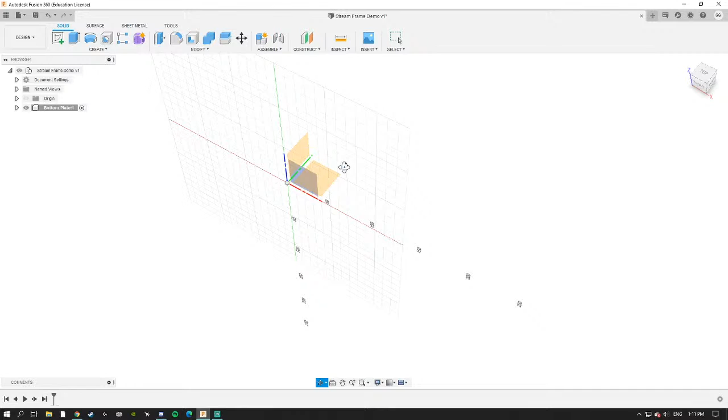And click OK, so now we're ready to start actually designing. Come up to the top, click New Component, and we'll start with the bottom plate. Just name it what you want, press OK. Now you can click L to bring up the little origin, then click the axis you want to start sketching on. I'm going to sketch on the bottom, top-down view.

First things first, we're going to put in our 20x20 screw holes. I like to start with just 2 lines going out left and right. This is good for when you're changing the symmetry of your frame later on. This will be a 3mm screw hole, so I can just type in M3 and we see how we set that parameter earlier on.

If I press OK, what you'll notice is if I finish my sketch, I can come up to parameters, change that M3 value, let's just say to 12, okay? And see how the hole got bigger? Very nice, that's helpful later on.

So I always like to do that when I start designing my frame. Let's put it back to 3mm and keep working. To get back into the sketch, come over to the bottom plate, click on the 2 triangles till you can see the sketch, double click on it, and here we are, back in. Now we want this hole to be 10 millimeters from each of the axes, so when we mirror it around these axes, we get a 20x20 hole pattern.

Am I going to design my own frame for racing? I've been working on a frame for quite some time, almost a year now. Hoping to release it through the Australian frame company Quad Racer / Lethal FPV in the coming months, so look out for that.

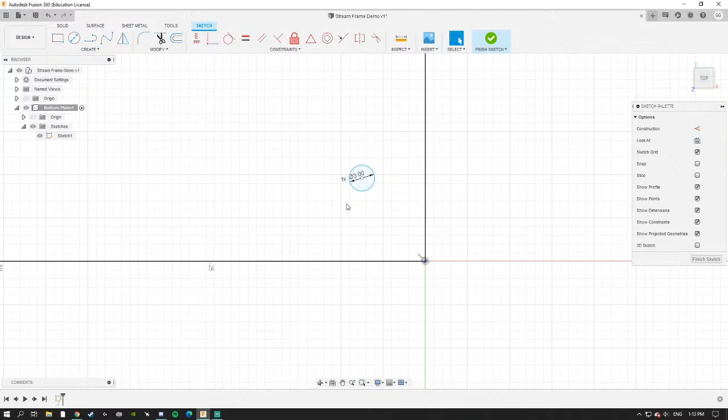Anyway, so to set the distances, we click D. Click on the circle, click on the line we want it to come to, and set that to 10 millimeters. Then click D again, the circle, the line, 10 mil. So now we've got a circle that's an M3 screw hole size that's 10 millimeters from each of these lines.

Okay, then what else would we want? For arm mounting, how about we just do a 30x30 and 20x20 screw hole and leave it simple like that. Come up to circle, make another circle, click dimension, the D key, and set it to M3 once again. Now what we're going to do for this one is set it as a 30x30 screw hole, so that's 15 millimeters from each axis, just like that.

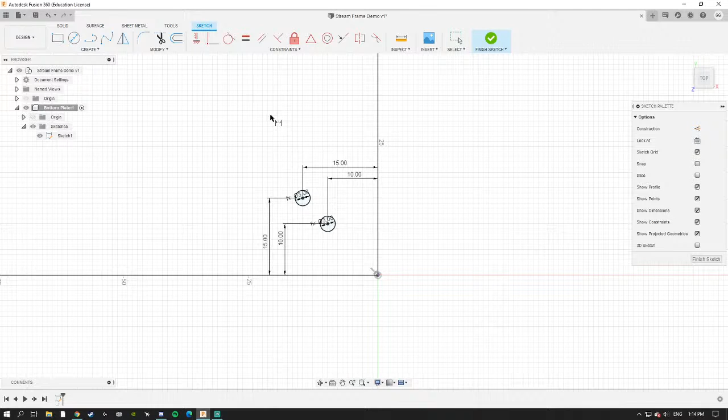So now we've got 2 screw holes for 30x30 and 20x20. You'll see when I mirror it around these 2 axes, it'll become all nice and square. But for now, we'll just work in one quarter. This is good because it saves you doing like a quarter the work essentially versus doing this 4 times, and it's really bad to have to repeat yourself over and over. In the bottom plate, I think these are the only screw holes we're going to need.

So now I'm going to do the outer perimeter of the frame. Because this 30x30 hole will be the outer edge of our bottom plate, I'm going to use this offset tool. Click on the circle, and I'm going to offset it by, let's say, 3 mil. Then I press OK. Now, working off this, I will just get the arc tool.

I'll click once on the circle, once over here, and I'll just place this third point anywhere.

So essentially what I'm going to do is taper in from this perimeter over to this side, and the same over here. Let me quickly do that.

A really handy function we can use here is the tangent tool. If I click tangent, the arc, and then the circle, see how it comes up and stays tangent to the circle wherever we drag it. That's super handy. Another handy feature is that this arc is essentially a section of a circle.

So what we want is for it to contact this line completely perpendicular. Let me try it... no, that won't work. Okay, so another way to do this is to make this line, that point, and this line pretty much touch.

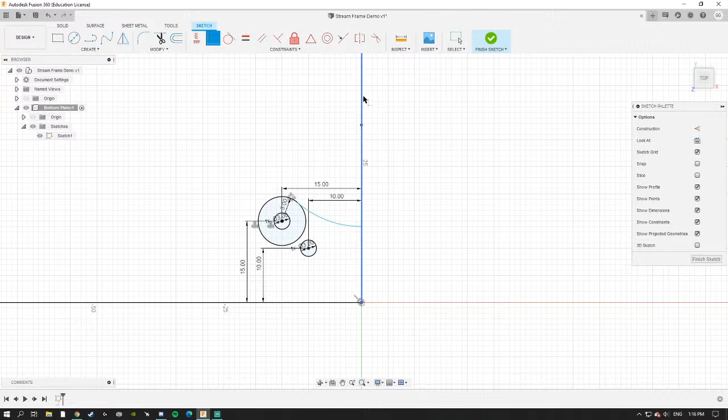So we can use the coincident tool up here. Click on the point, coincident to that line, and it places the center of the circle on this vertical axis, which means this line will contact completely perpendicular, and then it'll be tangent to the circle here.

At this point, it's just personal preference how thin we want to make this, but just for the sake of the video, I'll space it around 15. That should be a good number.

Now what I can do is draw a line from that 30 by 30 hole inwards, and I can actually mirror this line around it.

So I'll do that again. I clicked on the line I want to mirror, create mirror, and then we select the mirror line right here, and see how that just mirrored it nicely.

And then this is where all the magic happens. We select everything, including all these dimensions, but we don't need these lines coming up the top. I don't know why it's still selecting them, so we can just do it manually.

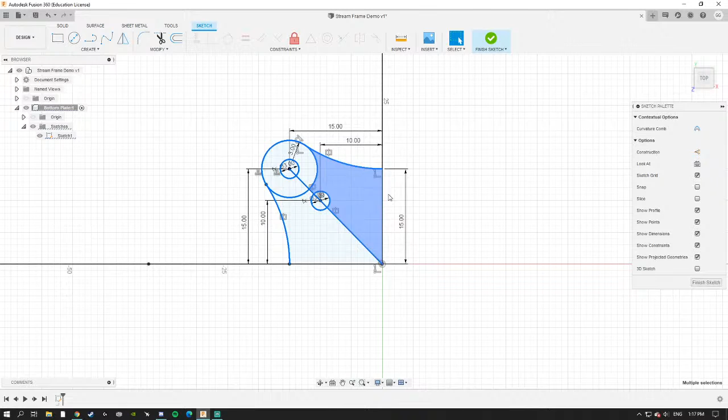Okay, we select everything just like that, and then mirror along this axis. There you go.

And then we select everything one more time, just like that, and then we can go mirror along this axis. And there you go. We've got something that's starting to resemble a bottom plate.

Just for ease of use, lines like these ones here that aren't actually part of the structure, and then these lines that we used for mirroring around, which also aren't part of the structure, what I like to do is highlight them all by shift clicking.

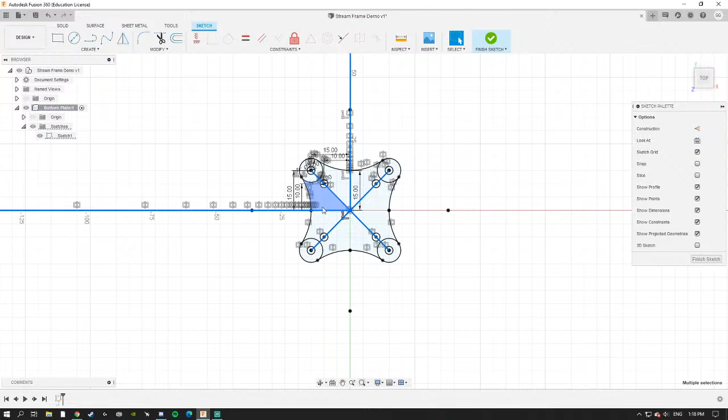Then you can press X. This makes them construction lines, which pretty much means they don't count as a boundary when you're selecting zones to extrude, which is handy. It saves you from accidentally not clicking little portions.

So that's that. Now that this sketch is done, I can click Finish Sketch, and we're going to extrude this to be a 2mm thick bottom plate.

So I'm going to click this middle zone, and then the radiuses around the 30 by 30 mount screws, by once again shift clicking. Come up to my top left and click Extrude, then select 2mm. And there you go, that's a bottom plate.

Okay, now let's start working on the arms. To make a new component for your arms, what I'm going to do is come up to the overall component, select that by ticking this little circle, right click on it, and then click New Component. And I'm going to name it Arms.

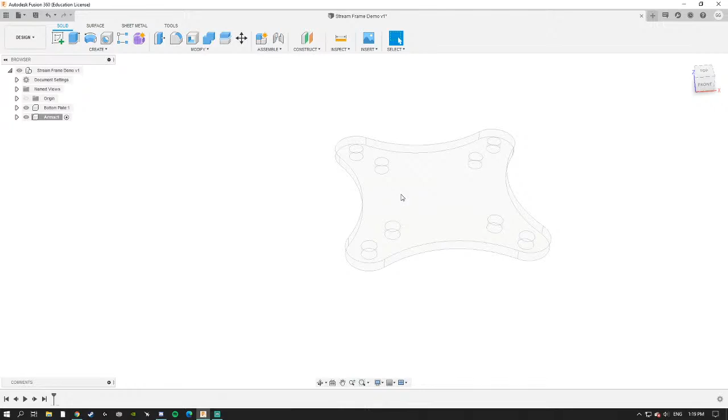I'm going to choose to start my arm sketch at the exact height of this bottom plate. A way I can do this is I can click L, and instead of clicking one of these faces like I did to do the bottom plate, I'm going to click the bottom plate itself.

Okay, now I'm actually sketching, and what you'll notice is I can lock my cursor to all of these screw holes and all of these edges, which makes it a lot easier to build your arm around the bottom plate.

Okay, so where we're going to start is I'm actually going to start by making the tip of the arm and work my way in. So if we want a 200mm motor-to-motor diagonal distance, what we'll do is we'll go a length of 100mm from the center, then click Tab, and set that to 45 degrees. Now we've got 100mm, 45 degrees, and we can click Enter.

So this is essentially going to be the path our arm takes. Because this won't actually be a border of the arm, I'm going to make it a construction line, which is what happens when it goes dotted. And then at the very end of this is essentially the middle of our motor mounting screws. So what you'll notice on most arms is they have that little hole in the center, just in case your motor has a screw at the bottom that hangs a bit low, so it doesn't hit the carbon.

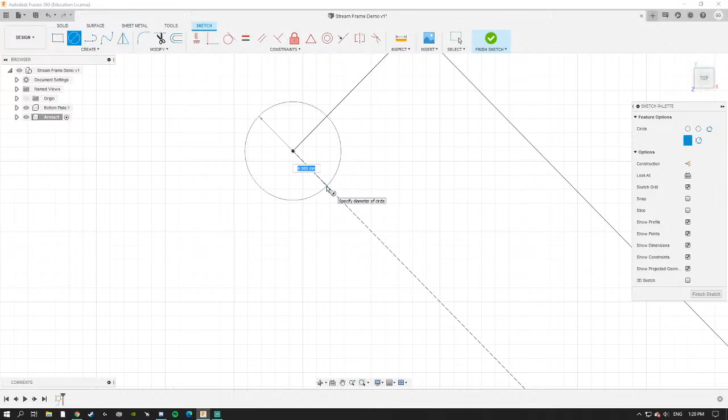So a common size I like to go is about 7.5mm. That seems to work for me. I haven't had any issues with that.

Yes, X is to create the construction line. So if I click on it again, we can make it a solid line. Click on it, X again, construction line. You can also just use the button up here, which does the same thing. So click on the line, construction, not construction, so on and so forth.

Okay, we're just going to go for a typical 16mm mounting pattern. So what we can do here is we can make a circle, click D to set the diameter, and just make that 16. So now all our motor screws are going to lie around this circle.

Now I'm going to make a line going from the center out. What you'll notice is this is because the arms are perfectly 45 degrees, the motor mounting will also be like a perfect cross.

But if your arms aren't perfectly 45 degrees, it's good practice to add this line. Why that's handy is because you add the line, you put the M3 motor screw hole at the end. Luckily for a 45 degree arm, this line ends up being just perfectly horizontal.

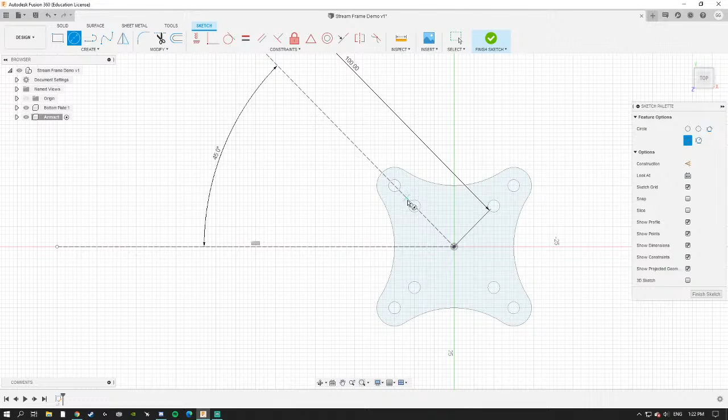But if the arm wasn't 45 degrees, so in something like a Stretch X or Squish frame, or even if your arms don't go through the 30x30 and 20x20 mount holes to end up being perfectly 45 degrees, what you can do is set an angle between the arm and the line going to the motor hole, and set that to 45 degrees. That way you've got your motor holes evenly spaced in relation to the direction that the arm protrudes. That'll make more sense a bit later on.

And then what I can do is... actually, I'm going to try something, this might make my life really easy. So I'm going to highlight the circle and this line, and go circular pattern. I'm going to select this as the center point, and set a quantity to 4. Look at that, how handy is that? So I pretty much saved myself doing that 4 times by just using the circular pattern tool.

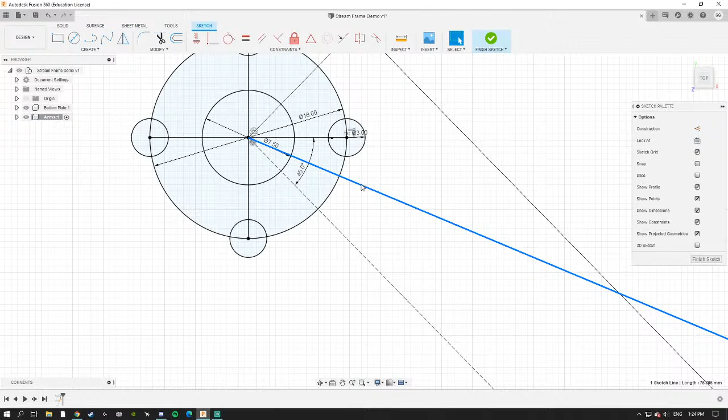Oopsie. I'll show you why setting this angle to 45 degrees is handy. So let's just say your arm came out in this direction. Yeah, I know, mind blown, crazy, eh? Let's say your arm came out in this direction. You'll have this screw hole really close to your arm and this one really far away.

So in this case, what you'd want to do is set the angle from this motor screw line to the center of your arm, set that to 45 degrees. It moved the arm, okay, let's just... where is it? Let's just fix this line in place so we can set this properly. So we set this angle to 45 degrees, and there you go.

Now, in relation to the arm, all the screw holes are evenly spaced. So that's what I was trying to say before with the 45 degree angle arm. Anyway, I can undo that. There we go. So you always keep this angle at 45 degrees, essentially.

Okie dokie, moving on. How did I lock the line?

So if you make any line, and you don't properly define it, you can just move it around, change its length and whatnot. If you don't want to properly define it, but you don't want it to move either, you can right click on it and click fix or unfix, and that essentially makes it green, and now you can no longer move the line around, though you can still change the length. I think length is the only control you have.

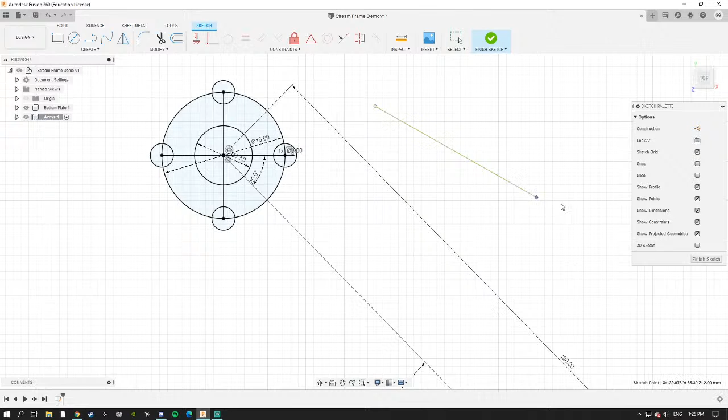Now that this is done, you'll notice there's a lot of lines in here that won't actually correspond to edges of your carbon fiber. Things like these lines going out from the center won't have much effect on the final product, and also this 16mm diameter circle won't have much effect on the final product.

So I'm going to select them all and make them construction lines. Then I'm going to set the distance from the motor hole to the edge of carbon, so I'll just set a circle of any diameter. Then we can use the D function, but instead of just clicking on the outside, we're going to click the outside and then the inside. This allows us to specifically change the distance from the M3 screw hole to the outside edge of carbon.

3mm is usually a safe amount to go, sometimes you can go 2.5. This is more judged by the thickness of your arm and how much strength you want, and how much you want to be breaking your arms at the motor base.

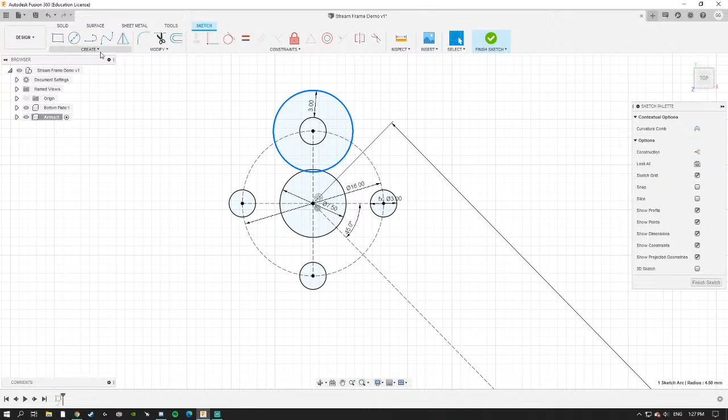From my experience, 3mm usually works pretty well. You'll notice we can also use the circular pattern tool from before. With that circle, set the center point there, and then set 4. Now we've done this 4 times. Let my computer load. Lastly, we want to create a nice rounded edge between each of these circles.

How I like to do that is go to the arc tool, which allows us to select 1 point here, 1 point here, and then get this 3rd point wherever we want. A good place to put it is usually on this 16mm diameter line.

Then I like to use the tangent tool up here. Click on the arc, click on the circle, it becomes tangent. Do the same over this side as well, click on the arc, click on the circle. Look at that, we get a nice smooth transition from the radius around one motor hole to the radius around the other.

Now you just want to do the same for the other sides, so I'll circular pattern that around the center 4 times. Done. You'll notice we don't really need this one because that's where the arm protrudes from, so I'm just going to delete that. But here, if we highlight all this section, this is essentially the end of your arm, all done.

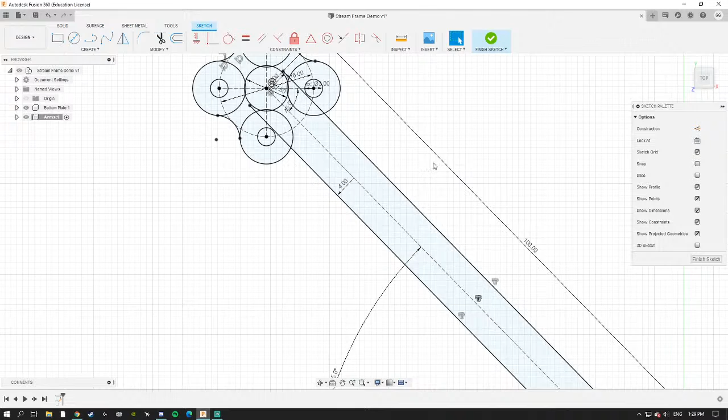To do that, I'm going to click on this construction line and click offset. If we want 8mm, we're going to offset 4 in one direction, click on the construction line again, and then offset 4 in the other direction by doing a -4. Now you'll notice from this line to this line is 8mm, which is a good thickness for your arms.

And then I'm just going to come all the way down to the base. Now we're going to do the mounting solution. For the first screw hole, I like to make it a little bit wider around that screw hole than the arm is naturally, so I'm going to set a circle.

Then I'm going to calculate the distance from the outside edge of the M3 hole to the outside edge of carbon, and make this about 4mm for extra thickness, and do the same 4mm around the 20 by 20 mounting hole. So distance from the screw hole to the outside is 4mm.

One screw arm removal has become a pretty popular thing these days, so I'm going to make it so that this first 20 by 20 hole is only like a half hole, so it can slide over, and then the 30 by 30 will just be a full hole. We can start by just making this a straight line connecting the two edges.

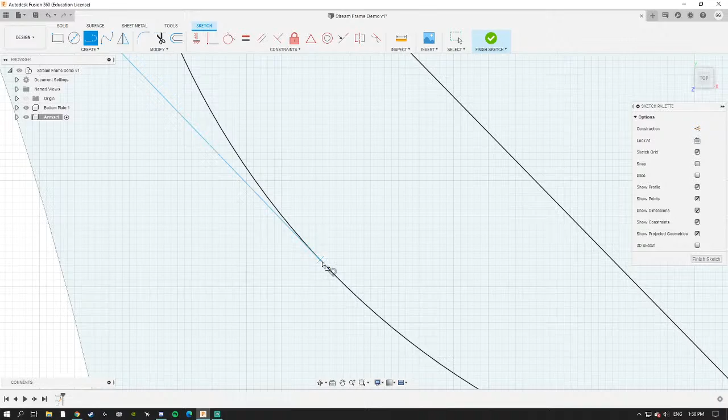Because I rushed it, you'll notice it automatically made two of them tangents, but not the others. So we can manually get the tangent tool, click that line, and like that. Now we've got a little marker saying it's tangent to the circle there and tangent to the circle there.

And then it went black. When it goes black, that's when the sketch is fully defined and it can no longer be moved around without changing certain variables. See how this one isn't, it's blue, so it's not fully defined, and we can still move it around a little bit. But as soon as I get the tangent tool and make it tangent to the circle, there you go, it goes black.

Okay, now for the last step of making the arm, what we're going to do is take this circle and make little lines that come out from it in this direction. So this is how the one-screw arm removal is going to work.

So we make both of these lines, then go parallel, and click this construction line we're working from. I have to make them both parallel to the construction line individually, so I'll delete that constraint. We click on one of them, go parallel, then to the middle line, and do the other one separately, just like that.

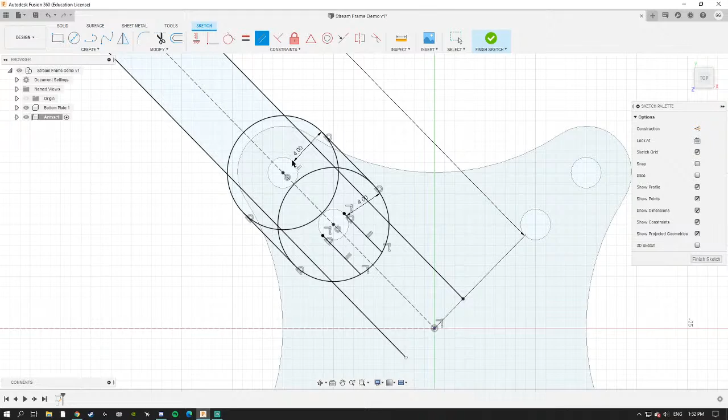See, now they've gone black and they can't be moved. This doesn't look too much like an arm, but after a little bit of cleaning up, it'll be a pretty nice arm. So I'm going to go finish sketch.

And what of this do we actually want to extrude? We want to obviously extrude these circles, these little edges there, the main arm, but we want to make sure not to select these little overlapping parts, because this is that circle in the center of the motor.

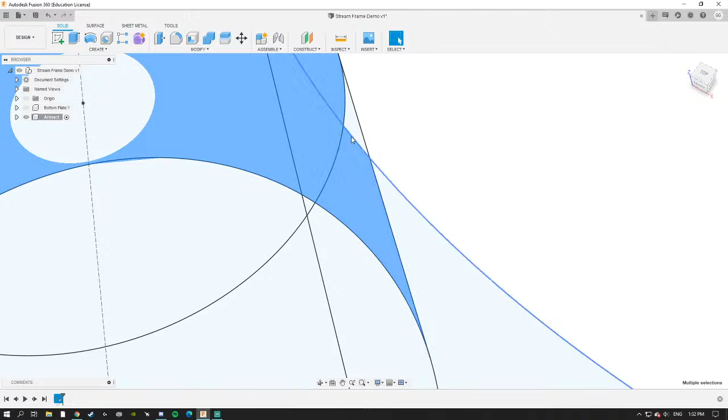Then at the base, I'm just going to hide the bottom plate over on the left here so it disappears. And what do we want? We want all of this area, and that area. Here, here, here, here. You could get caught out, but you've got to make sure to click all the little white areas you want, like that.

And now, that is essentially what we're going for with the arm. We're just going to click extrude, going 5mm thick for the arm, and press OK.

There you go. Obviously it looks a little bit messy at the time being, so we're going to shift click these two edges here, and this is the first time we're going to use the fillet tool. Click F on your keyboard and drag this out. Let's go 30... actually let's go 20. Yep, there you go.

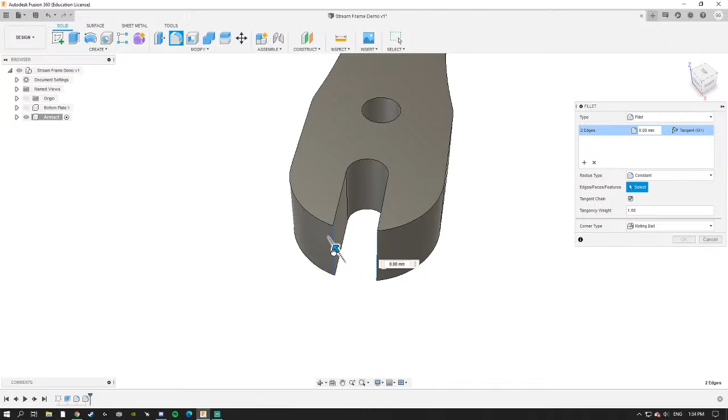That looks pretty safe. And then we're also going to clean up these edges. So what should we go here? 50? Yeah, 50 looks good. And then last but not least, these two sharp edges at the very end, we're going to bring them in, let's say 1mm. And there you go, that's a completed arm.

Now all that's left to do is mirror it in 4 directions. We're going to open up the arm folder, open up the bodies, highlight the one body we've made, create mirror. Select the plane we want to mirror around, and select this one. Okay, that's 2 arms. Now we're going to click on body 1 and body 2, create mirror, select the plane, this one right here.

There you go, we've got 4 arms. See how the bottom plate's kind of white? What we can do is, if we just click this top circle, that makes all of the frame visible. So far that's 4 arms, a bottom plate, and let's move on to doing the mid plate, which is where things get a little bit more interesting. But see how this is already looking pretty good?

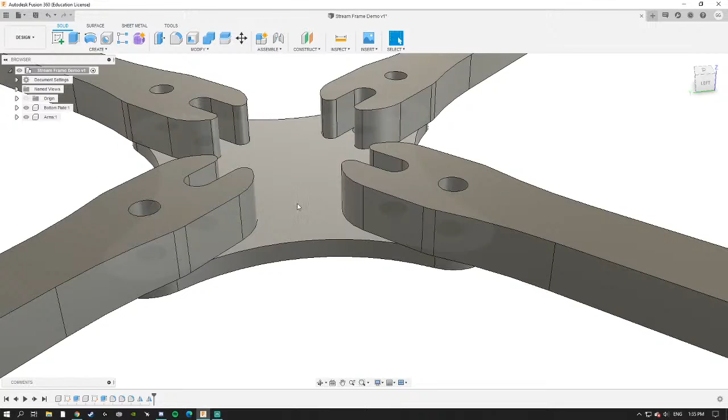Later on we might make this gap a bit wider so we can fit a 16mm battery strap in, but I'll do that at the end just to make our lives a lot easier. So as we did for the arms, right click on the overall component, create new component, and we're going to call this mid plate.

We could make a sketch at the level of the arms, but the annoying thing about that is I don't think it'll put the origin of that sketch in the center, because each of the arms are not really centered themselves. So what we can do is use a construction plane.

If we click construction plane, click on that bottom axis...

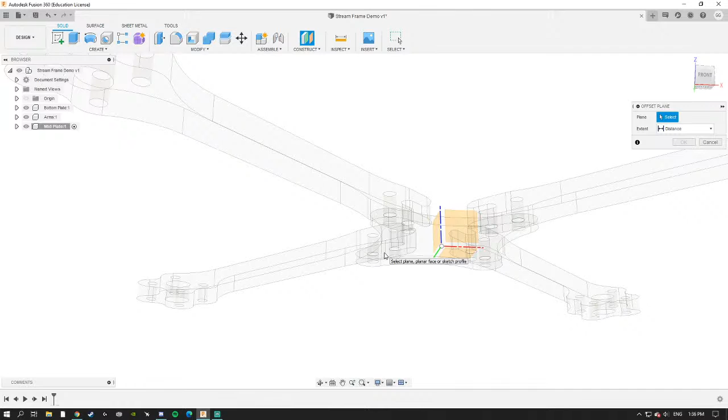If you want to do only 3 holes, this is just a basic tutorial, but that's pretty easy to do. Just subtract 1, and you can just change this edge, so instead of going to a screw hole, it just comes up right to this one. But we'll just stick with 4 for now.

Anyway, back to the mid plate. We can create a construction plane. Let's hide the arms and bottom plate so we don't accidentally click on them. We click on the bottom surface, and then bring it up. The arms are 5mm, plus the bottom plate is 2mm, so that's 7mm total, and press OK. Now what we've essentially done is we've got a plane that we can sketch on that's the height of the top of the arms.

Click L to start a sketch, and see how now we've got the origin planes, but also this extra one that we created. I'm going to click on that and start a sketch. What you'll notice is when we did the arms and did the sketch on the bottom plate, we could actually lock our cursor to the screw holes, but since we just did a construction plane this time, we can't, so it's not letting me click on these circles in any way.

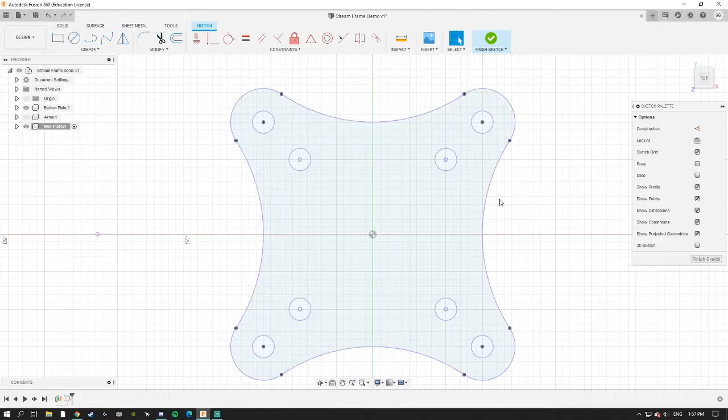A good way to get around that is to use project. That's a tool where we click P on the keyboard, and we can just select in the center of the bottom plate, click OK. Now essentially what we've done is we've projected the sketch of our bottom plate onto our mid plate.

So the only difference between our bottom plate and mid plate is that we're now going to add screw holes for our standoffs. As we did in the bottom plate, I'm going to make some lines that we can simply mirror around to make our life easier later on, just like that. Then our standoff hole up here, we're going to make it an M3 diameter.

Okay, and then where do we want to place this? I'm going to do it about 24mm. So the spacing between the 2 front standoffs is 24, and the spacing between the back and front ones, let's say, is 55mm. So we click D on our keyboard, click on the circle, then click on this line. And 24, since it's only to the center line, we halve it, so that's 12.

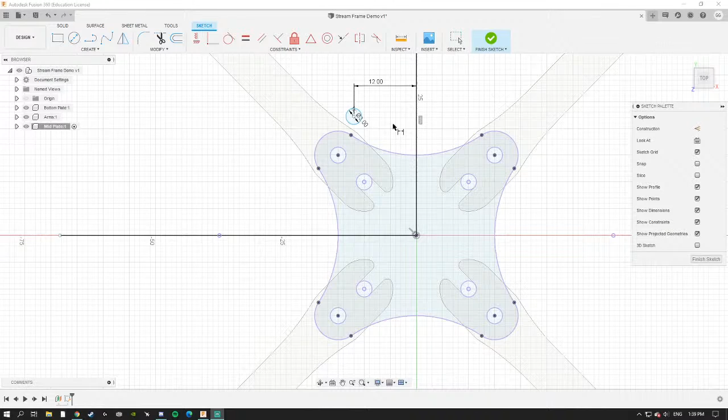And then, like I said, that 55 spacing from the bottom plate, so we can click the circle, click this line, and then what's half of 55? That's 27.5, click enter. Okay, so this is now where our standoff location would be.

Now what I'm going to do is use the offset tool once again, and offset it 3 millimeters - all the same things I did on that bottom plate to get that nice rounded edge. So I'm going to get that arc, 1 point on the circle, 1 point on the line, and place a third anywhere. Use the tangent tool to make that line tangent, just like that. Then we make this point up here coincident with the line. Last but not least, we can move this wherever we want, because over at the standoffs you don't need quite as much structural integrity, so I can actually bring it down to about like here, looks good. Okay, so I'm going to set that spacing now.

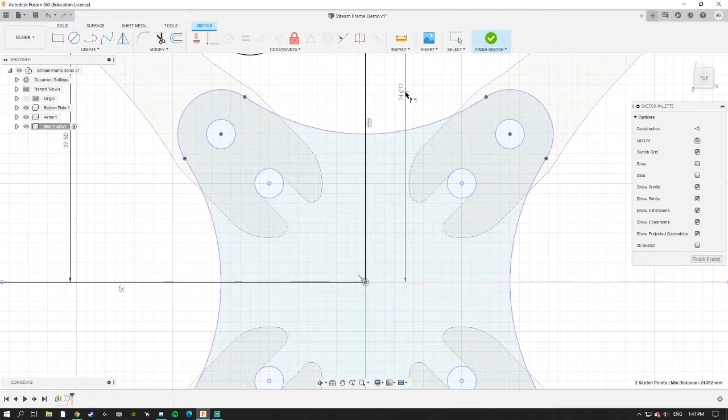24, that's pretty close to 25, so we'll just roll with 25. There you go. And then we have to do this edge.

So I'm going to use the arc tool again, which I absolutely love. Click on that circle, this circle, set this last one anywhere, then once again tangent tool, arc tangent to that circle, arc tangent to that circle, and see how it locks itself in place now.

Okay, now we've essentially done everything we need to. Oh, actually, I almost forgot one step. This is very important if you want to use press nuts, which I assume most people would. These holes are still only M3, so we're going to have to beef them up to be press nut size.

Okay, so we use the center, the circle, click on the centers of these, and we set that parameter at the start for the press nuts. So we just type in press, and press enter, and it gives us that extra bit of room for press nuts. There we go.

What you'll notice is because we used the bigger circle, the distance between the edge of the press nut hole and the edge of the carbon is no longer 3 mil. If you want to change that, that's really easy to do. You just have to make a new circle and set the diameter from the outside edge to the center of the press nut to be 3.

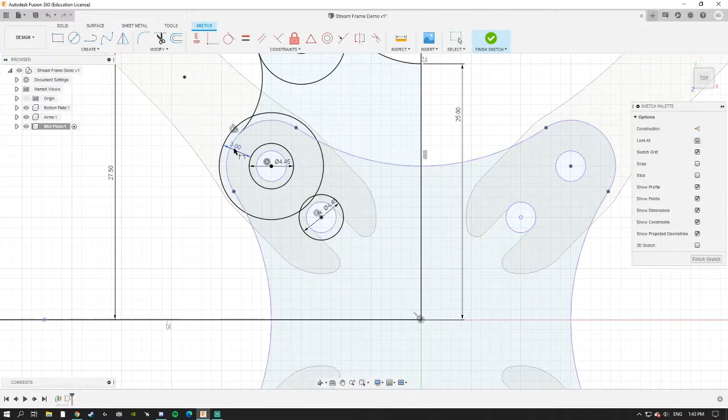There you go, my computer needed a sec. And then all we have to do is pretty much redo this line and this line so they are flush against here. But I'm actually not going to do that, because what we can simply do...

In terms of where the standoffs are so your camera doesn't hit the stack, this is just stuff you'll learn.

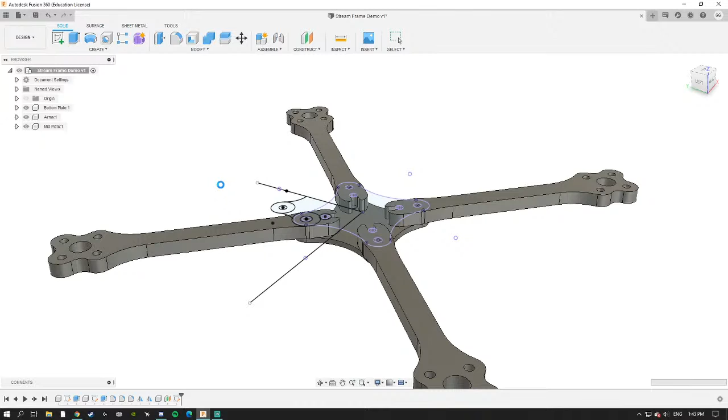I actually use models that I've made up. So if I go into my random selection and click, so we got to make sure to have this one open, and then bring my Racer Nano model in, and I can actually place my camera wherever I want it. And I've also got a stack model.

You can just mock up those models really quickly. You don't have to put a lot of time into them, but just make like a big cube, I guess, in the center, and then you can kind of see how big your stack is and where your standoffs need to be.

The measurements I'm going with are just from experience really, and what I know works. And I know 55 mil forward and back and 24 mil side to side works fine. I might actually post links to all of my custom made components and stuff a bit later on in the description of this stream.

But at the moment we've got the 3 mil radius here, the standoff, everything's looking good, so I'm just gonna... oh, we almost forgot to mirror it all.

So let's go back, use that mirror tool, things we want to mirror, all this standoff stuff, and then also this 3mm radius around the press nut hole. Oh, and also the press nut lines.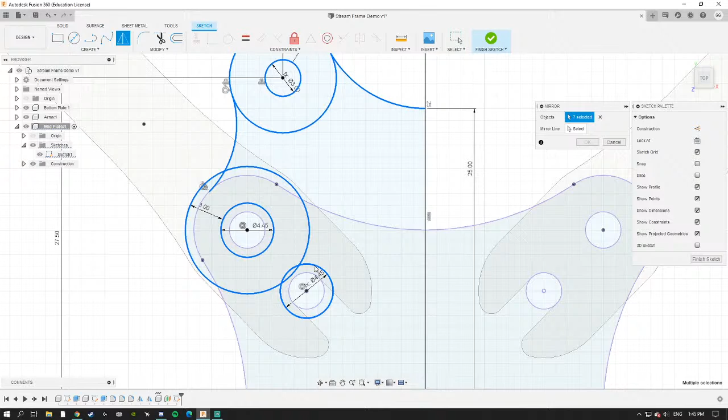This is all the new stuff we added to the sketch. Then we mirror it just like that. And then we're just going to select everything once again and mirror in the other direction.

So what I'm doing is I'm just shift clicking on everything to select it all without deselecting other things. And that should be everything. Mirror around here. And then voila, you've got a bit funky but functional mid plate.

Now for the extrude, so we finish sketch. We just click on everything we need.

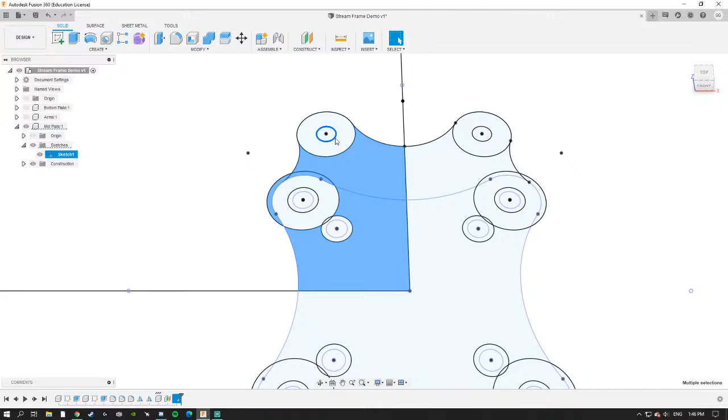Oops, I accidentally let go of shift. So this is why you got to be very careful when shift clicking, because if you let go of it for even a second, it can deselect everything you've been selecting, and that can get really annoying really quick. I did it again. You know what? Easy way to do it.

Just highlight everything and deselect what you don't want. So I don't want to extrude my screw holes.

Yeah, I know. Super big brain. Not.

Okay, that should be all the screw holes we need. So now that they're highlighted, extrude, and we're just going to extrude 2mm, just like that. Okay, looks a bit goofy, but that's essentially a mid plate what you got there.

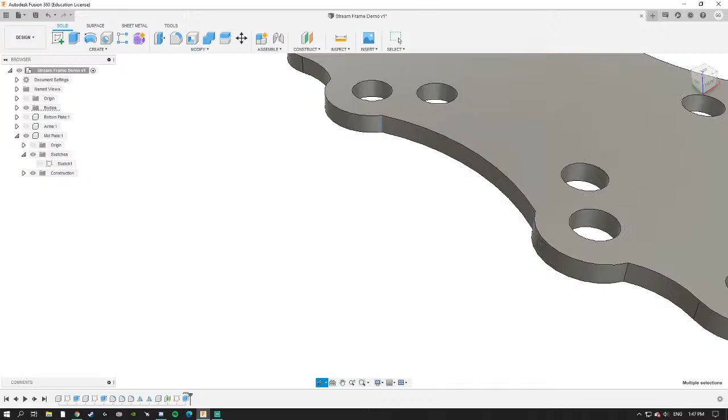What you'll notice is when I did the sketch, the reason why I didn't worry about smoothing out these corners is because it just saves us a lot of time if we just do it after with fillets. So we can shift click on all of these edges once again. There you go, and then we click F. Let's go 8. That looks pretty fair. Now we've got all smoothed out edges, and we can click OK.

So at this point, we've done our arms, we've done a bottom plate, and we've done a mid plate. And if we look at it from the top, all our screw holes are still lining up nicely, and we're ready to move on to the standoffs.

Okay, so make sure you've got that top component selected, new component, standoffs. Okay, so as I did for the arms, I'm able to do the sketch straight off that mid plate, okay, just like that.

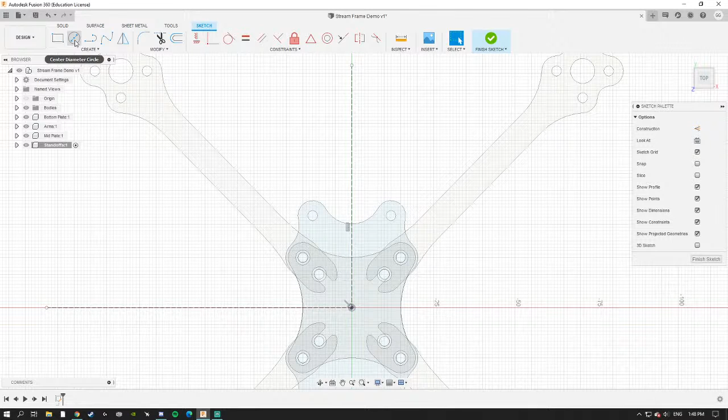Because obviously our standoffs are all going to be symmetrical, I can create that vertical and horizontal line. I'm just going to make them construction lines just to make my life a tad easier. And then we're just going to say the standoffs are 5mm thick, should do the trick.

So 5mm just like that. Essentially, we have the 3mm center, which the screw goes through, and then 5mm outside. So that's literally done for making standoffs. We finish sketch.

We extrude 25mm. Okay, we open up the standoff's body folder, and we just mirror this both directions. Oh, let's hide my previous things so we can actually see the origin, but mirror that, and then that way.

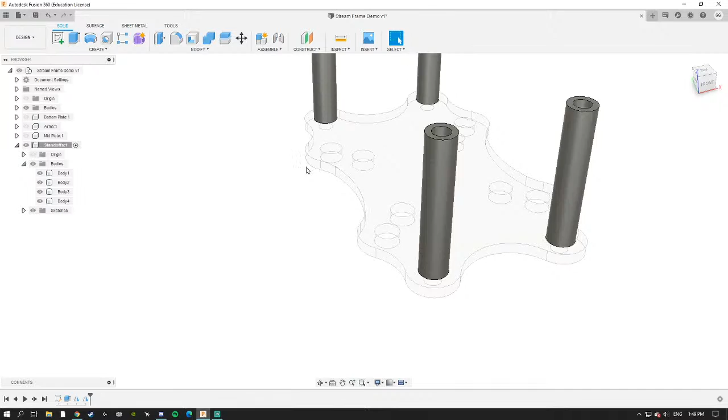So close up our folders and open up the overall component. Show everything. And here we go. Ah, okay, I'm noticing a problem.

In my mid-plate folder, there's actually no bodies. And what you'll notice is when I click on the body, it's up here, separate in the separate bodies folder. So when I went to do the extrude, I must have been selecting this overall component, and that's why the body ended up here. What we can do to move this back into the mid-plate folder is we just drag this body down, down, down, down, down over mid-plate and let go. See how this overall component now has no bodies, and in the mid-plate folder, there's our little guy.

Okay, now we should be all good to move on. We've got 4 arms, a mid-plate, a bottom plate, and 4 standoffs. So let's continue.

Okay, last thing we gotta do is the top plate. So as we've done for every other part, we make sure the overall component is selected, right click on it, go new component, top plate, okay, and once again, because we're working at the height of the tops of these standoffs, but there's not like one body, we're going to do that construction plane we did once again.

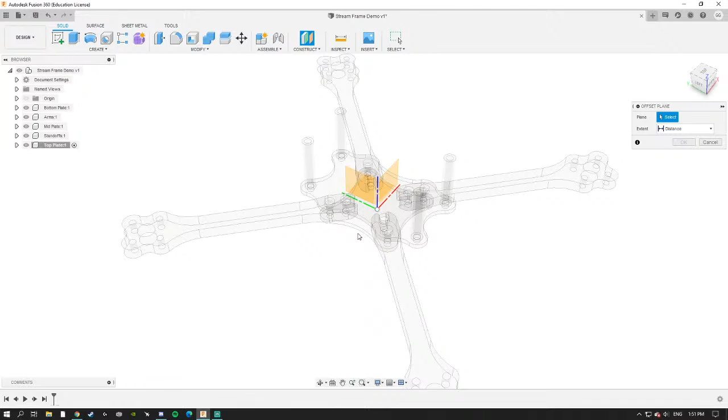While I'm waiting for that, we know that bottom plate's 2 mil, arms are 5 mil, mid plate's 2 mil, standoffs are 25. So with a bit of math, that's 5 plus 25 is 30, so 34.

Okay, so now we've got a construction plane at the height of these standoffs, and simply click L and click on that plane. Okay, so because we did the construction plane, none of these screw holes are locking. So project using the P key, we click on just the screw holes we need by shift clicking.

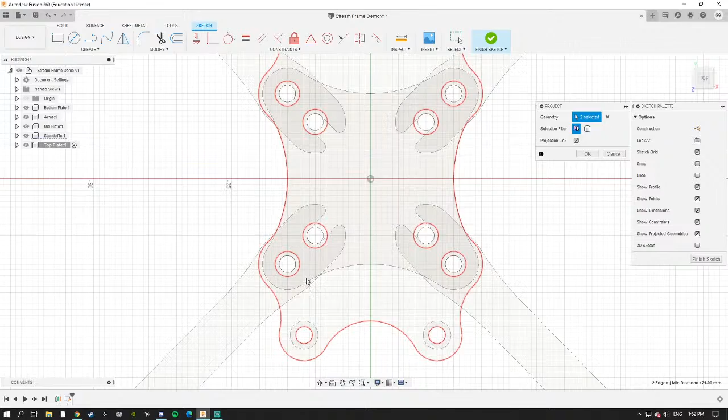Okay, so for the top plate, the only real things I need are the 3mm holes at the center of each of the standoffs. So okay, now they're projected.

Now I'm actually going to hide everything except for the top plate, because this is all we need to work with. Okay, we're going to set that 3mm radius around the screw holes to the edge of the carbon. Computer's a bit slow, there we go.

And so we don't have to keep repeating ourselves, we can just set up these lines and mirror this circle around 4 ways.

There we go. This essentially just makes sure our screw hole isn't too close to the edge of the carbon so that it doesn't break or something in a crash.

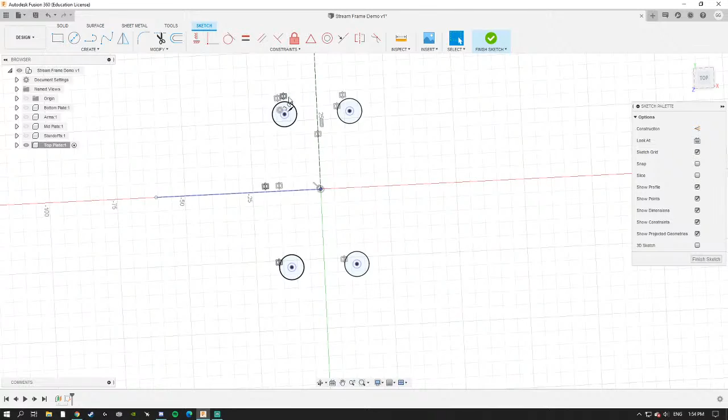Now I'm just going to make a really simple top plate, so I'm going to use this arc tool a lot. We could just do the arc to the center, but since we've already got this component over here, I'm just going to do it between the two components. Make sure they're both tangent to each other, then we've got this measurement to change. I'm going to bring it in a substantial bit because it's only the top plate and you kind of want room for your camera to poke out the top. That seems like a pretty good length.

See how it made the distance to the center point? That's because I did the arc from one side to the other. There was no end point in the center, which has its pros and cons. It just means we have to set the distance a little different - it's setting the distance to the center of that circle. I'm going to set that to 30, and by eyeballing it, that seems like a pretty decent distance.

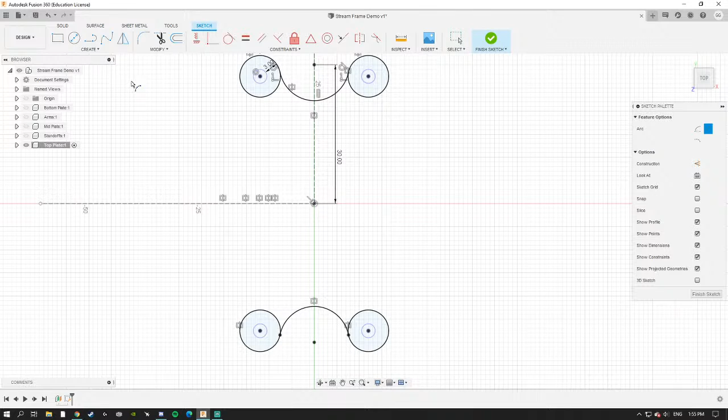Then we can mirror this across just like that. Now all we have to do is the sides of the top plate. Because I'm absolutely in love with this arc tool, I'm just going to go from one side to the other, something like that. Make them both tangent, and then figure out a good measurement.

Oopsie, I can't move this now. Control Z, please. There we go. Let's just get the distance. Ooh, jeez, the center of that's far away. I actually like that shape, so I'm going to leave it at 90, and that should do me pretty well. And then we just mirror this over to the other side, just like that.

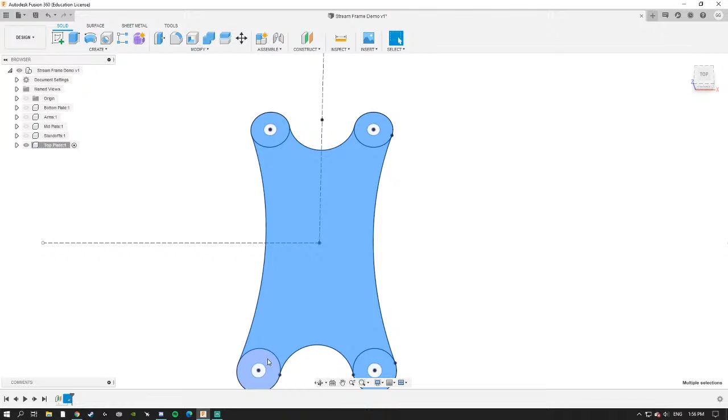Now it's not the prettiest top plate, but it's a top plate, okay, and it's something we can work with. So we finish the sketch, click on - by shift clicking on all the parts we want to extrude - and we select 2mm.

Now we are essentially done. We just unhide all our components, go to the overall component, and would you believe it, we've got a drone racing frame that's, you know, not the best looking, but...

Do I put holes in it to make it lighter? That is something you can do, but that's a lot more personal preference, how you want to do that.

And it's really, really simple. You pretty much just add sketches to all the planes and cut it out. I won't cover that in this - oh, actually, I've got time, I can cover it. So let's just say we do want cutouts.

So in the top plate, we make sure to select the top plate, so all the changes we make stay within the top plate folder. Any rules regarding strength and stuff?

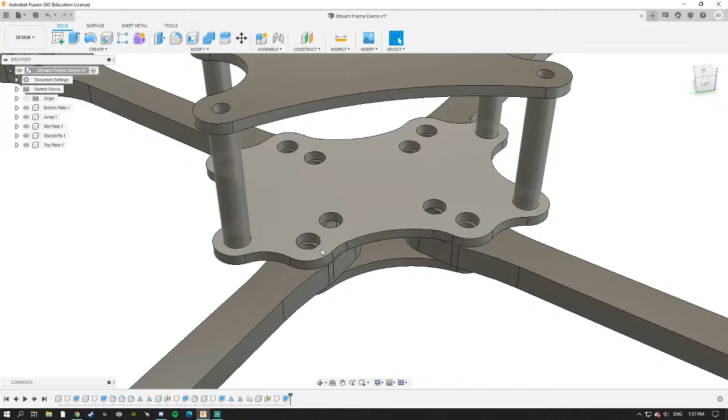It's really just what you learn over doing it a little bit. Like that 3mm radius is just something I've found works pretty well. Like 8mm wide arms by 5mm thick is just something that a lot of frames do, so I'm pretty confident that'll be, you know, strong enough.

In terms of cutouts, what you want to try to do is maintain as many full lengths of carbon fiber as possible. That's easier to explain when I set an appearance on this. So before I do the cutouts, I'm actually going to make all of this actually look like carbon fiber.

So I'm going to come up to the overall component and click A for appearance. It'll bring up this big menu. We go into the plastic... where is the carbon fiber? I swear carbon fiber was in plastic. Okay, doesn't matter, we can just search for it. There we go, carbon fiber. And then we just drag this onto everything.

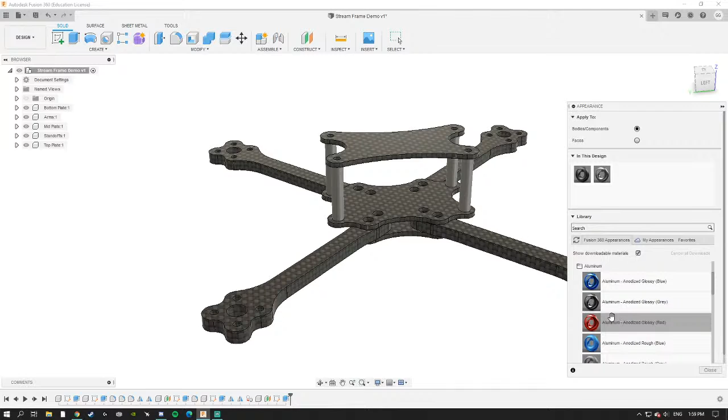Okay, just like that. Standoffs obviously aren't carbon fiber, so - yeah, where did that go? Dope, yeah dude, I'll just select whatever anodized aluminium I want. Let's go with red standoffs. That seems pretty cool - that was just under the metal aluminium folder in appearance. There you go, and then you just click escape to exit out of that.

Okay, what I meant by maintaining as many lengths of carbon fiber weave as possible - see on this top plate how you've got like a grid of carbon fiber weave. What you want to do is try to maintain as many full, uninterrupted lengths of this weave as you can.

In the top plate, this is pretty simple, but in something like your mid plate, where you've got a lot of interruptions already created by holes that have to be there, it's smart to make your cutouts in line with those holes, because you're just adding a cutout in an already interrupted path of carbon fiber weave, which means the non-interrupted ones get affected a lot less.

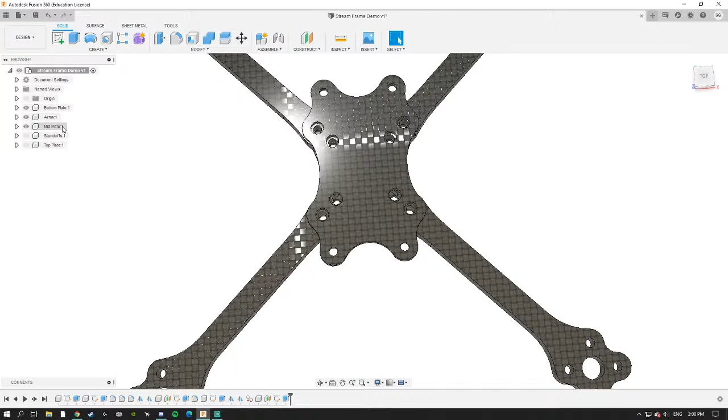So an example of that, if I go to the midplate, I'll just click on the surface. If I did a big cutout in the center here, sure, you'd save a lot of weight, but you'd essentially be cutting off almost all of the weave pathways, because it can't get through on the edges due to these screw holes, can't get through the center because of that big one, and once again on the edges it can't get through.

So you'd be a lot smarter to make something like a slot, make sure we're still looking from the top, something like a slot here or here - obviously this is just rough and I wouldn't put it this close to screw holes - but since these carbon fiber pathways are already interrupted, you're not going to lose too much tensile strength by putting cutouts there. That just means the places with non-interrupted lengths of carbon fiber can be fully full lengths, which leads to a stronger plate overall.

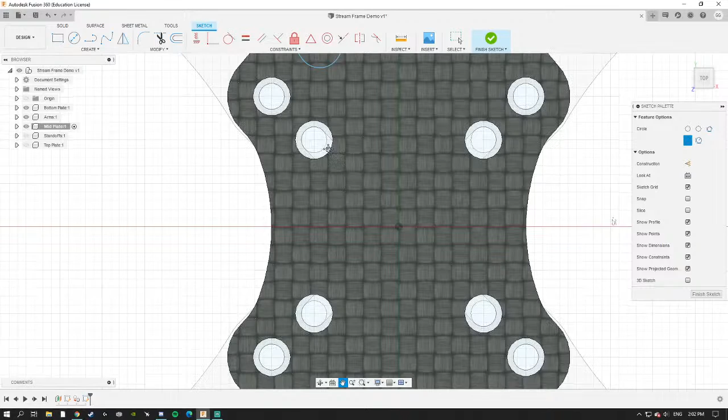Where will I add my cutouts? I'll just stick with circles because that's nice and simple. So I'll put one circle there, one circle there, and I might do just a very, very conservative slot in the center. So just like that. What you'll notice is all these are in really rough positions.

So we can just use the D key to start setting sizes. We can set this to, let's say, a 6 mil thick circle. Actually let's make it 5 mil thick diameter. I want to place it somewhere around there, using the D key.

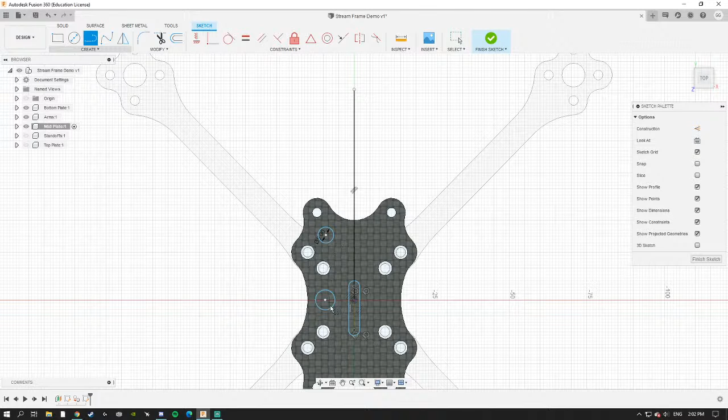Almost forgot - got to set up these straight lines so we can actually properly set our dimensions and do proper mirroring. Make them construction lines.

Okay, so we set the distance from here to there - let's leave that at 9 mil, seems pretty good. Here to there, let's set that at 20. Hello? Oh my god.

So why that happened was because this line here usually automatically sets to a horizontal line, but if it doesn't do that automatically - can I put the stack in CAM after? I sure can. See this top one, how it went black, and this one is still blue. How we can get around that is we just click on the line and click this horizontal/vertical constraint. It goes black, it's locked in, everyone's happy.

Now let's set this dimension to 20 mil again. That's a good hole, pretty safe, shouldn't interrupt too much carbon fiber.

And then we'll make this one - diameter of 6 seems pretty good. Its distance from the center, we'll make that 9 mil, so it doesn't get too close to the edge of the carbon.

And then what you'll notice is it can still move up and down. So instead of making the distance from this to the center circle 0, which I don't think works, it might work - what we can just do is the coincident tool. Click coincident, click the center of the circle and that line, and now they line up. It goes black because it's perfectly constrained.

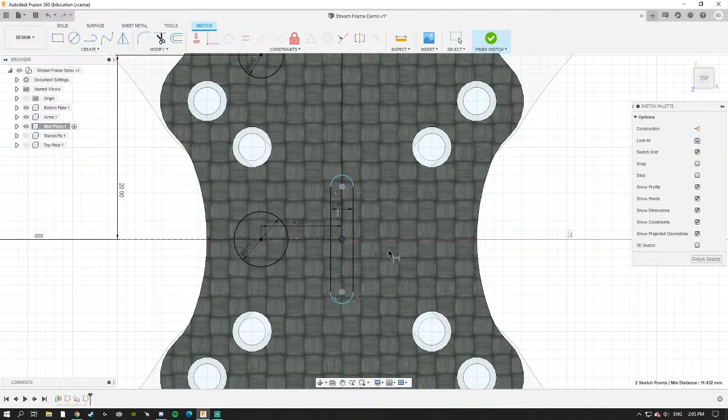I'm gonna set this center line using the midpoint tool and then that circle. So what that does is it lines up the midpoint of this center line on the center of the sketch, just like that. And then now all we can change is the height of it, and I'm just gonna set that by clicking on the top point, the bottom point, and set that dimension to 10 mil.

And now we could just mirror our cutouts around. So these two cutouts, we're going to mirror along that line. And then since these are in the centers, all we got to do is mirror these two around that axis, and we're done. Finish sketch, highlight what we want to cut out of the plate.

And extrude. Okay, normally extrude is to add material, but if you extrude into another sketch like that, it goes red and turns into a cut extrude. You press OK, and there you go.

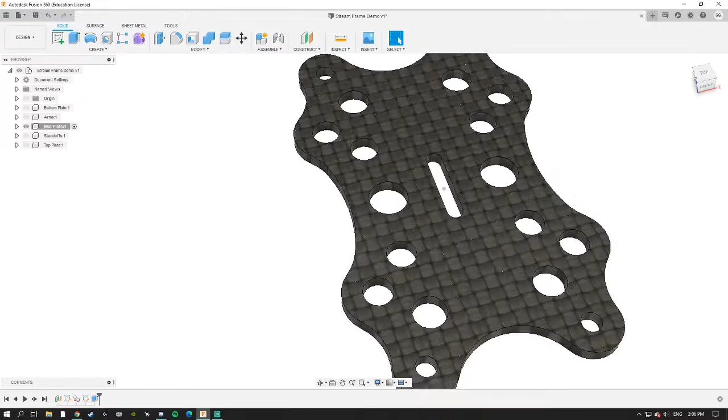Now that looks pretty messy, but the point is you've got a lighter top plate. I'll leave it at that. The bottom plate's already pretty small, so I probably wouldn't want to add too many cutouts to that. So we'll leave the frame just like that for now. Pretty dope, eh?

What's next? So this all looks like carbon fiber, but what you'll notice is if you highlight it all, minus the standoffs, just the carbon stuff, and look at the properties, its physical material is still steel.

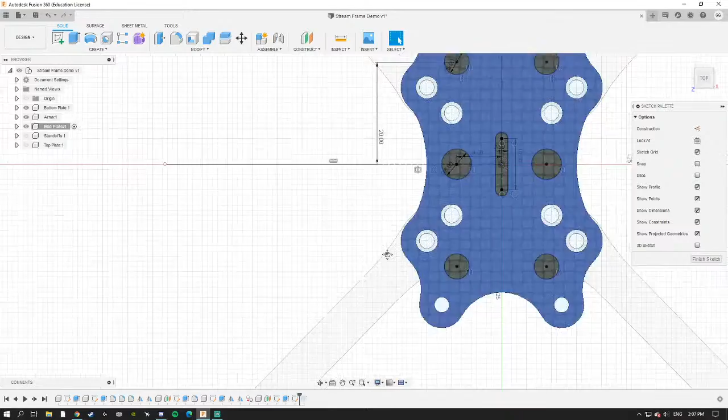Yeah, when you extrude, so if I redo this cutout, Fusion's got this cool thing where there's a timeline down the bottom where you can essentially go back in time in your work. So if I go back in time before I did that extrude, I can open up the sketch straight from that timeline. Oopsie. Or we can just open up the sketch manually like that. If I highlight everything I want to extrude...

LR FPV had a really good point. If I decide to change the thickness of this mid plate later on, and I only extruded it 2 mil down, if I wanted to change this piece of carbon to 3 mil thick, the cutout won't go all the way through. So what we can select is, on the right, instead of distance, we can go to object, and if we select that object as the base of the carbon, now no matter how thick this carbon is, it'll always cut exactly all the way through. So, good little addition there. Thank you for that.

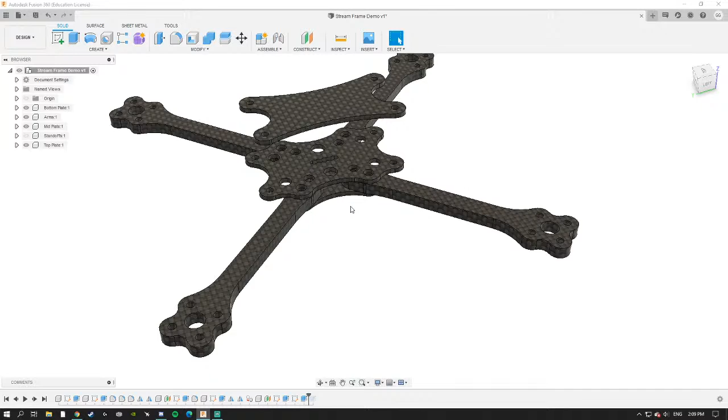Okay, so that's most of a frame done. If we want to look at the weight that we'll get, obviously standoffs aren't carbon, so we'll get rid of that. We just want to figure out the carbon weight. Okay, what's the best way to do this?

I think highlight everything, right click on it, and go to physical material here. I think this is the menu where carbon fibers are, yeah, here it is. CFRP is carbon fiber. So we just drag that onto everything, and now press escape. It doesn't look any different, but what you'll notice is when you look at the properties of everything, by just right clicking on it, now it is physical material carbon fiber and appearance carbon fiber.

Okay, what that allows us to do is calculate the weight. Going into properties, it says that this is 40 grams, okay? The inbuilt density of carbon fiber in Fusion I've found to be a little bit off. So a good way to combat that is... I'll give you a manual way to do it.

So you right click on carbon fiber, go edit, advanced, physical, and then mechanical, and I'm pretty sure it's the density, which I like to set. Wait a second, did I not go into carbon fiber? Sorry, I went into steel. Yeah, 1.6. 1.6 is Armattan. I use stuff that's 1.8, I think, but we can do whatever.

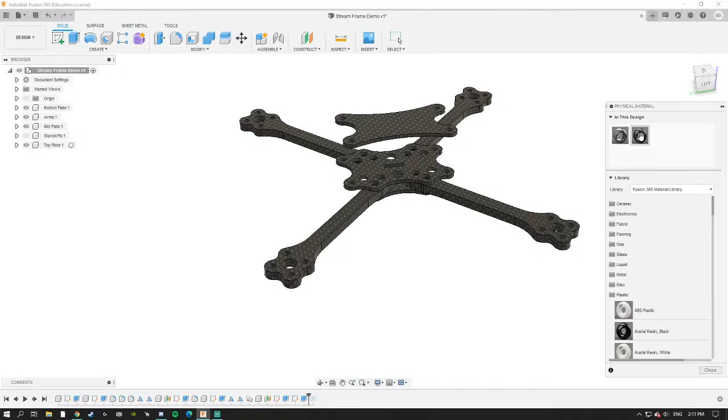So if you go edit, advanced, this time I actually went into the carbon fiber, not the steel. So it's currently set to 1.4, or if you want to use kilograms per cubic meter, that would be 1430, sorry. Since someone commented Armattan carbon is 1.623, we'll go with that by just changing this to 1.623, and then apply. Now we can exit out of that, press escape, and now we'll get an accurate weight measurement when we go into properties of 45 grams worth of carbon fiber.

There you go. Since the carbon usually doesn't change, that's all I measure the weight of. All the hardware, I don't bother, because you can change that so drastically with what kind of hardware you use, and aluminium versus other kind of standoffs and whatnot. And oh, right, components. This will be the last thing I do, is just adding components to it all.

I won't go over how to make 3D printed parts, because that's something I'm not super good at, and it takes a lot of practice. But in terms of just putting parts in...

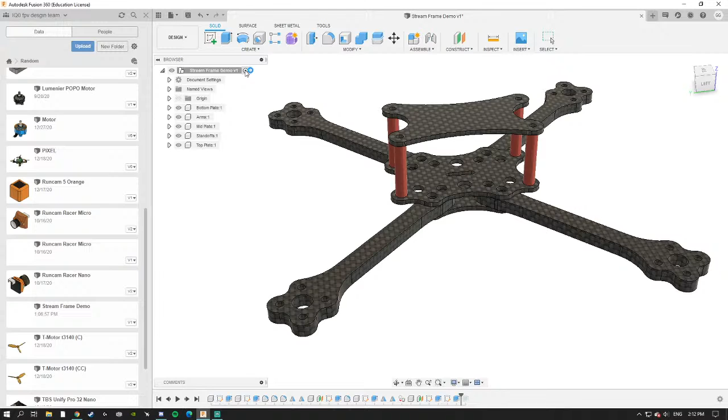I've got a Runcam Racer Nano which I need to put in. When you're putting it in, you have to make sure to have the overall component selected, or else the file for the component will go into one of these subfolders, which you don't want. I can angle it at 45 degrees and put it where I want it, a little bit up. Don't want it higher than the top plate, so that should do. Actually, maybe we should move it forward a tad, because that might end up colliding with the stack. So maybe this is better.

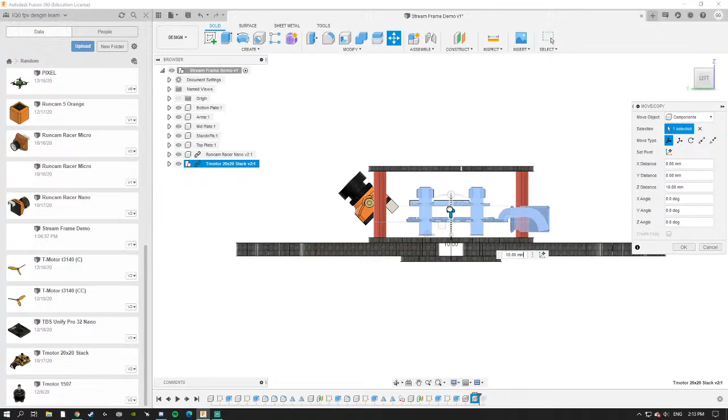With the overall component selected, I can put in a stack. Give it a sec to load. Okay, there we go. Now we just have to set the height of our stack to about right. So what's that? 10mm looks flush with the base of that. And then there's our stack.

Also, making these components I might make a separate video on, because they're pretty complicated. But essentially, we're done. We've got a frame with components that we're fairly sure fit. I could have obviously made those standoffs a bit further forward. Other than that, we're done.

It's up to you guys. Do you want to see me add actual hardware so you can make sure that all the screw holes align and everything works properly? That's completely optional though, if you're interested in seeing that.

How do you add screws? Okay, sure, I'll put that in. So I don't actually like to make my own screws.

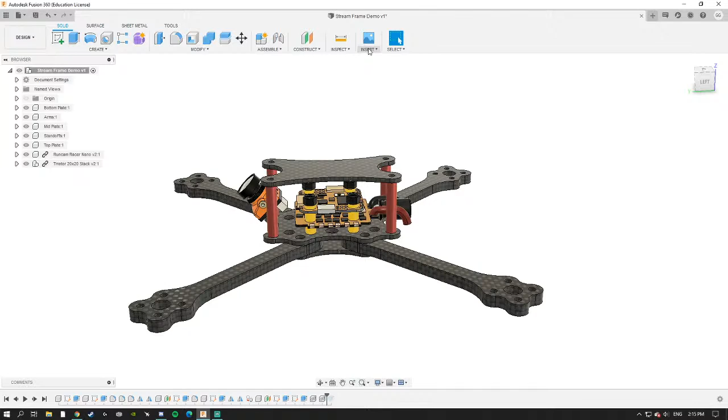Thankfully, Fusion 360 has this super cool feature where you can insert from the McMaster-Carr components catalog, which is like a catalog of tons and tons of industry recognized hardware, essentially. So under the Insert tab, Insert McMaster-Carr Component, just like that.

So we want to add screws and bolts. We'll use the button head, so rounded head screws. On the left, first of all, we want hex bits. But to sort through an almost infinite selection of these, you go metric, which is what I like to use, M3 screws, and then let's think how long we want.

Let's start with the top plate down, okay? So the ones that go into the top of the top plate have to go through 2 mil of carbon, and then let's just say 4 mil of the standoff. So that's a 6 mil long screw. Okay, so now we've essentially got all the parameters we need: an M3 button head hex bit screw that's 6 mil long.

So aerodynamics is a big controversial topic with frame design. A lot of people think it's super beneficial, and a lot of people think it doesn't matter. A lot of the time, especially on tight tracks, having drag on your frame isn't a bad thing - it helps you corner and stuff. There are other kinds of aerodynamic features like box frames, where it's not so much an aerodynamic shell allowing air to blow past easier, but using fins essentially to change not how well the air passes through your frame, but where and how that air passes through by essentially channeling it. It's too complicated a topic to go into in a video, and something I don't feel like I'm an expert on, so I probably can't help too much with that. I have done a lot of work on pods recently, but once again that's probably something for another stream.

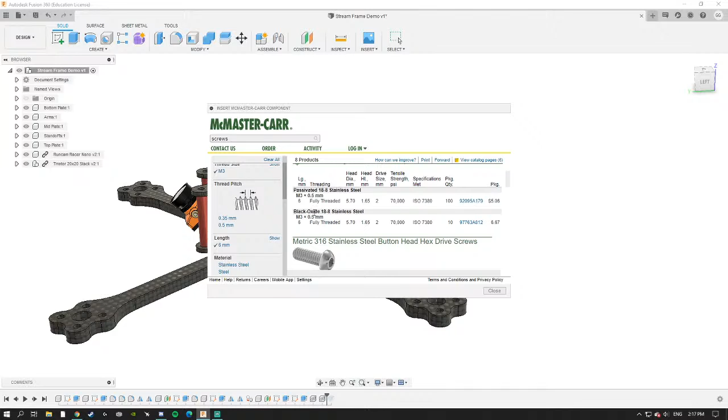Anyway, back to this. So under the 6 mil hex bit screw, I always just pick the first one. You get this little blue number link, which is essentially the part's industry code thing. You click on that, then go to product details. Under product details, you go all the way down to the bottom, and it gives you a way to insert the file into your work. I always use the 3D step file - it just goes in the nicest, and that's what works for me. Then you click save, and bada bing bada boom, you've got a screw.

So I'm just going to move the screw clear of the frame and click OK. But now you're probably wondering, how do we get this screw to be flush with these screw holes?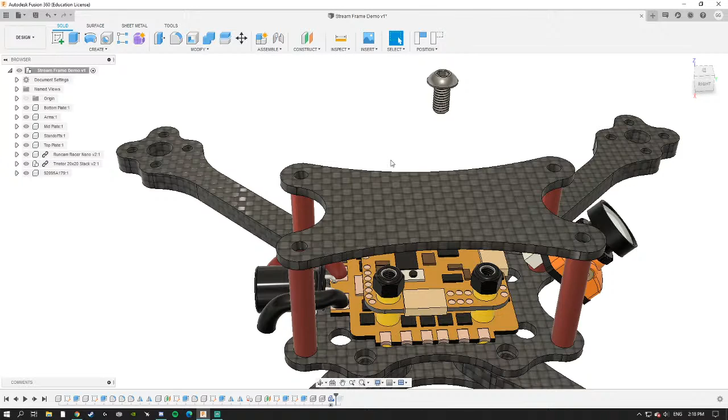Okay, so putting the screw where we want it, what we do is use the assemble tab. I like to use the joint, so we click joint, make sure everything's in its current position. What we want to do is line up this flat part of the screw head.

To this piece of carbon, perfectly in line with that screw hole. How that's done is we select the flat part of the screw, click Control, and that locks it so we can only select things on the plane of that flat section. So I'm going to click the very center of the circle, that little piece right there.

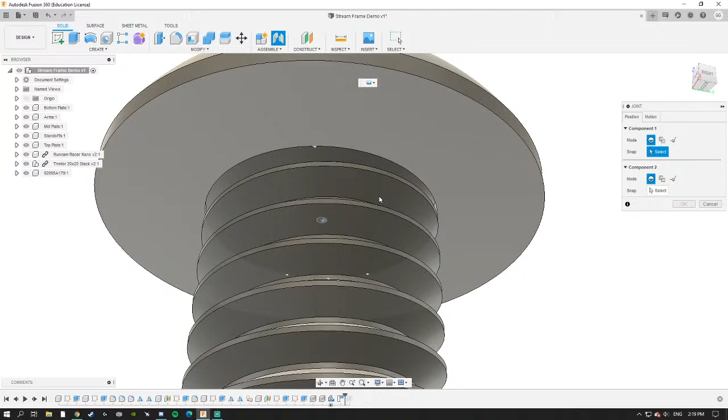I click on that, it goes white, then the screw hole where we want it, so we click. We drag our cursor over this flat part of the top plate, click Control, and then it only allows us to click things in line with the top of the top plate, and we select the center of this hole. Okay, and it does that. It puts the screw in perfectly where we want it.

Sometimes it can put the screw in upside down, like that. If that ever happens, there's just a flip button over here that flips it, just like that. Okay, then you click OK. That's one screw done. Then you just click on the whole component.

Oh, actually, is there an easier way?

Sneak peek of my frame that I'm bringing out. I don't know, maybe not. I don't want too many people seeing it, but it'll be coming soon. Just be ready when it does.

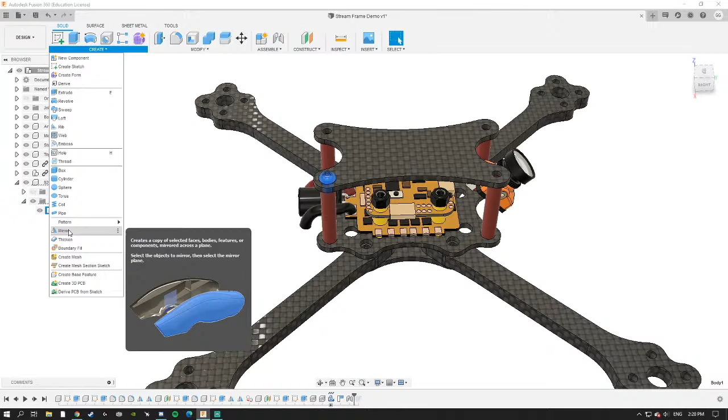Okay, see this screw body under the screw file number? I'm just going to click on that body and mirror it, just like that. And then you can mirror it in the other direction. Why I'm kind of looking under the frame is because it's hard to sometimes select these planes with all the components there, but I seem to be able to do it here.

Tiny peek, I'm sorry. It is really cool, yeah, I can't, I'm sorry. I've been told not to.

Anyway, with these screws, now what we want to do is want pretty much these exact same screws to be on the underside of this bottom plate. So what I'm going to do is try to mirror this.

Just like that. And then we can physically... I wonder if they'll move all together, if I joint that. No, that's not going to work.

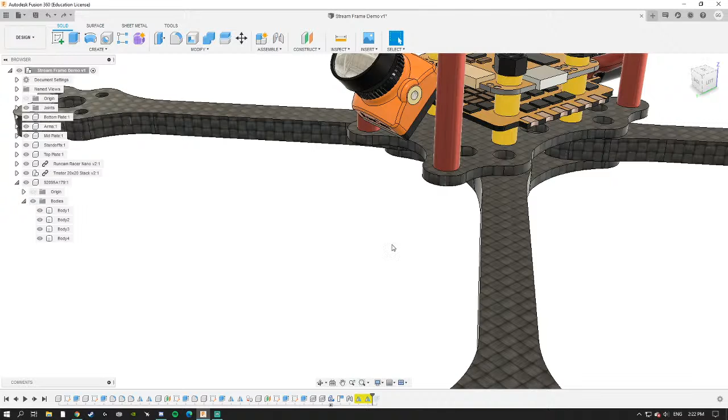Okay, we're just going to have to do it manually, unfortunately. So I'll just take one screw, pop it down here, and then add a joint. The center of that to the center of that. We've made a mistake, fellas, we've made a mistake.

Okay, I think we're going to have to skip all the mirroring and just add the components in again, because it's not liking me doing this separately. Yeah, I'm just going to insert them again.

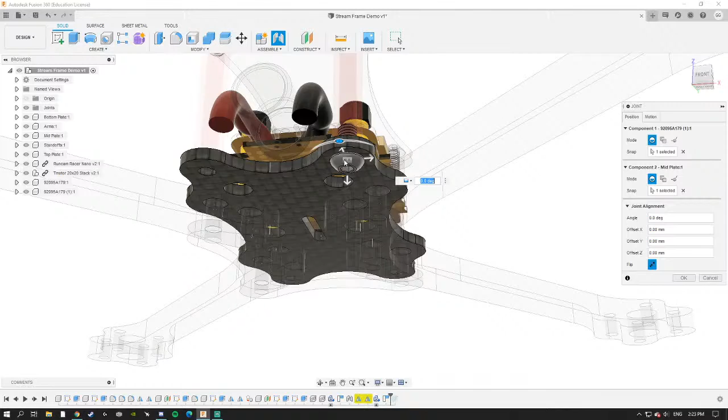So in here, rounded screws, hex, metric, M3, 6mm, product details, step, save. Okay, yeah, there we go. Move it into space, create a joint, capture position, click on the flat edge, control center, flat edge, control center. And that's that, okay.

Then we can finally mirror this last one. So we click that center plane, mirrored. And then, there you go.

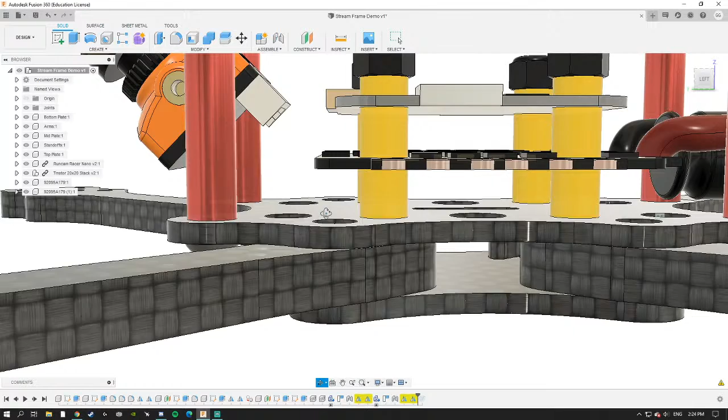So we've done those screws, and just to finish, we're just going to do the rest of the bottom plate ones. So a press nut usually protrudes 2mm from the top of a plate, so that's 5, 2, 2, 2. So that's 5, 6, 7, 8, 9, 10, 11 mils is how long we'd ideally like the screw to be.

If I'm right, I don't think 11mm screws are made, they only make it in multiples of even numbers 2 apart. Why don't I click inches? Metric M3. And yeah, so they don't actually make 11mm screws. Luckily 10mm works.

With press nuts, you don't actually have to go all the way through them to get good thread contact, so 1 mil less will work just fine. And we're just going to insert the first product it gives us.

Step, save. Give my slow computer a sec to load it. Okay, and then doing this is the same as everything else.

So we make a joint, capture position, click on the flat edge, control the center, flat edge, control the center. Pops it in. Okay, so you'll notice that if there was a press nut there, that would come up nicely into it.

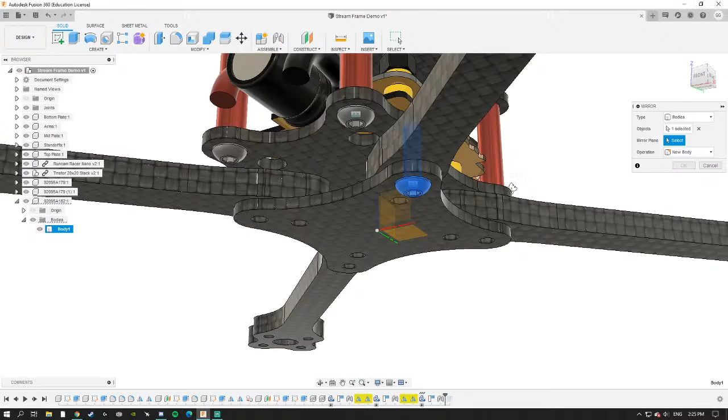And then we mirror that across that way. Yeah, no, it's so super satisfying when the screws pop in. Where is that flat edge? There we go. Okay, and we mirror it that way. So those are the outside screws.

And the last thing we're going to do is just add the stack screws. So insert component. You know what? Before we insert, I'm going to find out how high are these nuts from the base of the frame.

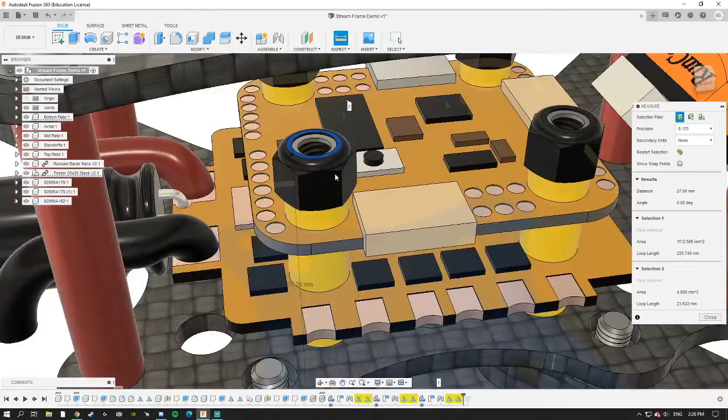So what we do is we go measure. We click one point at the bottom of the base plate, and then one point anywhere up here, and it'll give us a measurement. What does that say? 27 mil.

So what I can do is I'm going to pick something near 27 mil for the length of my stack screw. So rounded head, hex bit, metric, M3, something around 27. Let's just go 30 mil. Yeah, that should work fine. Okay.

Product details. Step folder. Save. Step file, sorry. Computer almost crashing. Okay, we good. That's a long screw.

And then last but not least, we just do the joint. So flat edge, control, click on the center. Flat piece of carbon, control, click on the center. Okay, that probably protrudes a little bit longer than I'd want it, but it does the trick.

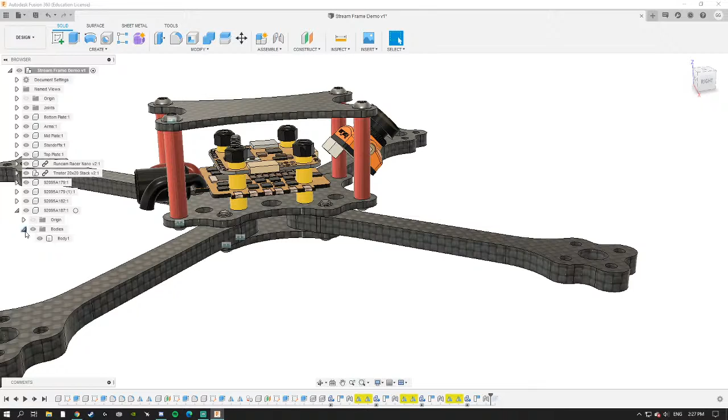And then, once again, like we've done the other times, we just mirror this around. Trying to find those axes to mirror around is a bit difficult. What I could just do is just hide everything I've made. And then finding these axes is a lot easier.

There you go. That's all the screws for a frame you need. There you go. Ooh, and we should just add motors to make it look fancy, eh?

So click on the overall component. I've got these beautiful T-motor MCKs that I made myself. Which look amazing. Oh no.

I think that screw just comes with it. I don't want that. Yeah, I'm just gonna remove that screw for now, if I can.

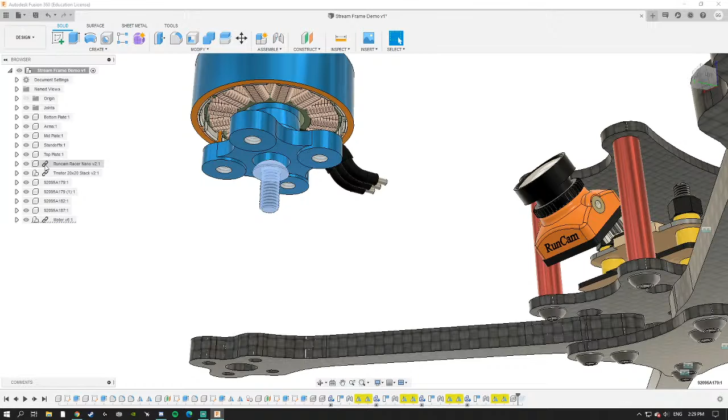Ooh, what you'll notice is when I insert all these things from other files, they have this like chain next to them. That means that what's in the part is dependent on another file. So if you want to make it so you can change that, you just break the link by right clicking on it. And now this gives me the flexibility to delete the screw if my computer doesn't crash.

Okay, so I can just right click and remove that screw, just because we don't really need it for this. Yeah, I'll link all my parts if I find a way to do that.

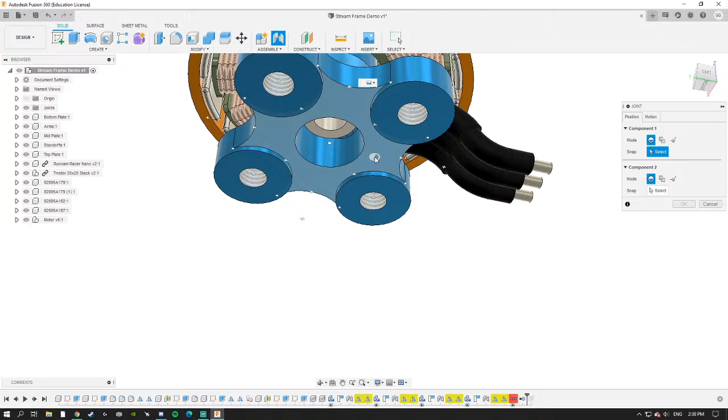Okay, and then centering the motor on the arm is pretty simple once again. So we click... Oh, actually, maybe it's not simple. Okay, I'll just do this an easy way. So you click on the flat edge, click on the center, and then line that up with the flat side of an arm and the center.

Okay, then we rotate it till it's in line with the arm, which is just at 45 degrees because the arms are 45 degrees, and we press OK. With these T motors, what you'll notice is they've got that slight... I can't move it now.

I'm just gonna... You know what? It's fine like that. Let's leave it like that. I don't want to fix it. Yeah, let's just leave it. That's fine. So, once again, we'll just mirror the motor around.

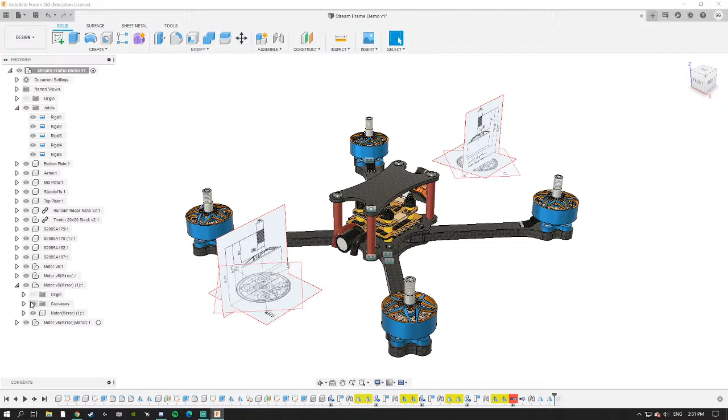Oh my god. All my factory drawings are now going everywhere. Let's delete all those canvases.

And there we go, we're done. Components, frame, everything. This, honestly, would probably work as a frame, even though I did it really quickly. This would probably be an okay frame.

But I'm gonna finish the video there. Hope you guys enjoyed and learnt a few things about Fusion 360.